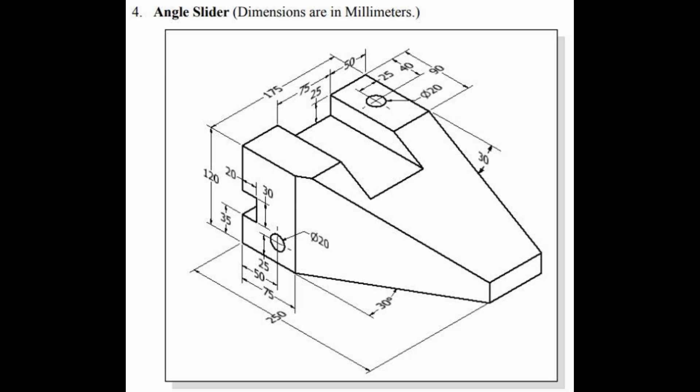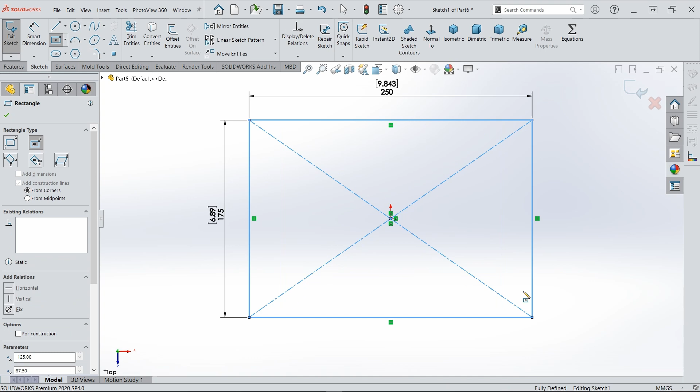Now that we are fully loaded and ready, let's navigate to our feature window and select Extrude Boss, select our top plane. Let's draw a center rectangle from the center of origin, 175 millimeters by 250 millimeters. Let's exit our sketch and let's extrude at 120 millimeters upwards.

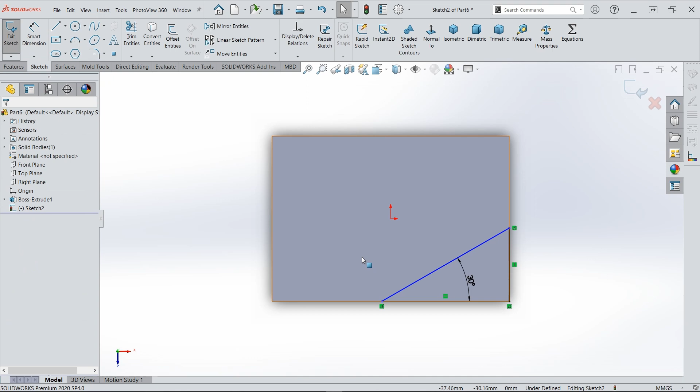Okay, now let's navigate to Extrude Cut. Let's click our top plane and let's draw a triangle, our triangular sketch, just like that. Let's navigate to Smart Dimension and let's dimension that 30 degrees. Okay, and from this point to the left hand side, that will be 75 millimeters. And let's exit our sketch.

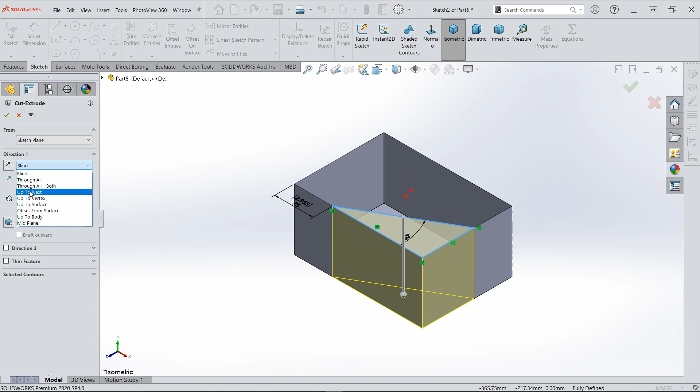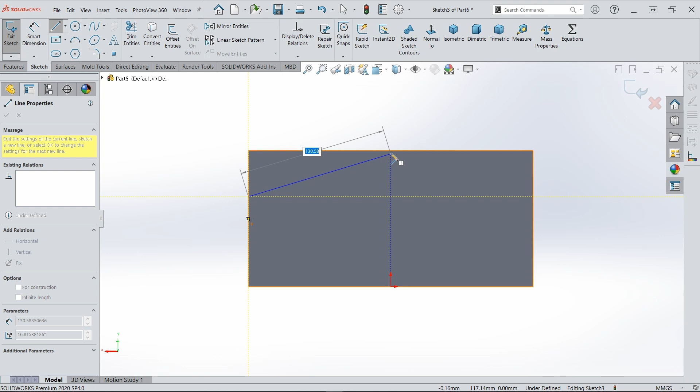I'll navigate to our isometric view. I'll change this from blind to up to next and click OK. Then I'll repeat Extrude Cut. I'll rotate to the back view. I'll select the back face and I'll repeat this step to take out this portion. So let's create another triangle,

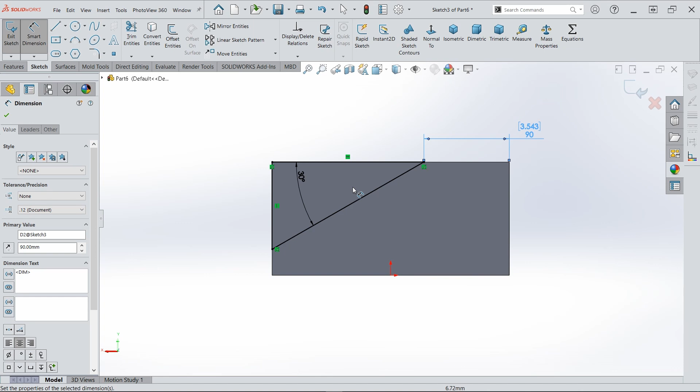and the angle is the same as the previous, 30 degrees, and from this point to the right hand side, that is 90 millimeters. Okay, and let's exit, and I'll go to an isometric view and I'll change it again to up to next.

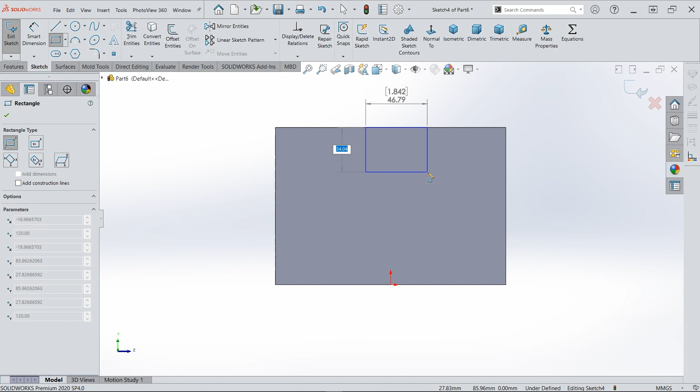Okay, and now let us create another Extrude Cut. Let's rotate. Let's click our left face and I'll draw a rectangular sketch using the corner rectangle, and let's dimension that. So let's go to Smart Dimension. The width is 75 millimeters.

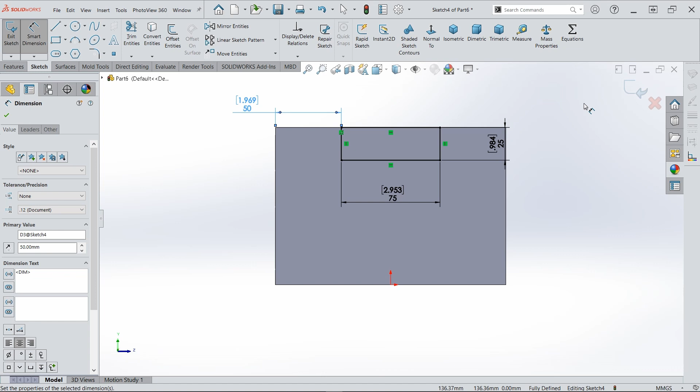The height is 25 millimeters. And from this point or that line to our left hand side, that is 50 millimeters. Now let's exit back to an isometric view, and I'll change this from blind to up to next.

Okay, let's continue with our Extrude Cut. Let's click on that face. Let's first draw a circle here. Let us define that circle. So this is 20 millimeters in diameter. From the center to the bottom, that is 25 millimeters, and from the center to the left hand side, that is 50 millimeters. Now let's draw a corner rectangle.

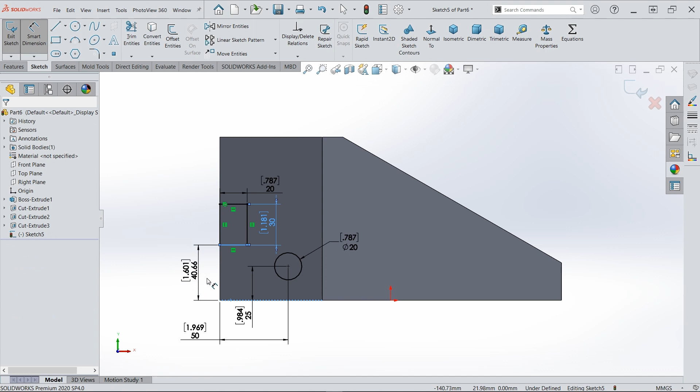Let's define that. The width is 20 millimeters. The height is 30 millimeters. And from the bottom to our rectangle, that's 35 millimeters. Now let's exit that. I'll navigate again to an isometric view, and once again I'm going to choose up to next.

Okay, now our final extruded cut will be on this face. So let's draw a circle. Let's define that circle. It is 20 millimeters in diameter, just like the last one. From center to the left hand side is 40 millimeters, and from center to this edge, that is 25 millimeters.

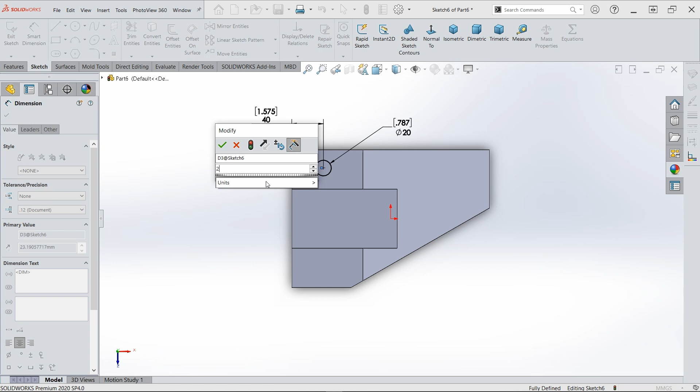Okay, exit to an isometric view. I'll rotate, and I'm not going to leave it to blind. I'm going to use up to surface, and I want it to go to this surface. In that case, if we ever update our geometry, everything will update nicely.

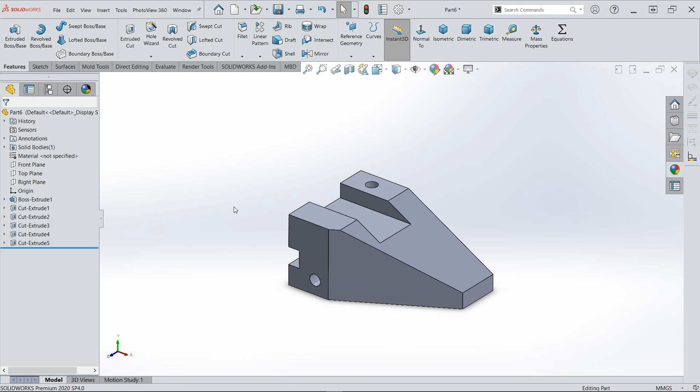Okay, and we can also analyze our part just like a drawing in our graphic view. All we have to do is change to hidden lines visible right here, and then we can use a spacebar. We can click our top, and you can analyze this just as a drawing to have an idea how it would look, and you can repeat the process.

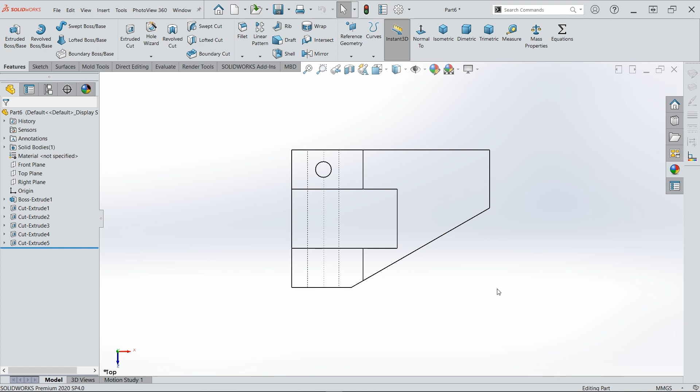Let's go to our right view, just like this, and let's go to our front view, just like that, and then we can always click spacebar again, and then you can come here and go back to an isometric view, and you can go back to your shaded edges. And that's it for this tutorial.